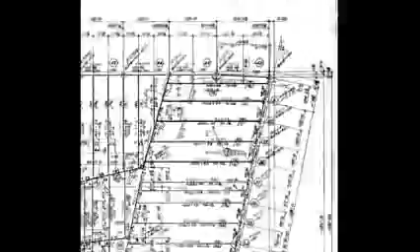NIST's collapse hypothesis for World Trade Center 7 involves floor beams at the northeast corner of the building pushing a girder which spanned columns 79 and 44 off its seat and initiating the collapse of the building. In case you're not familiar with this hypothesis, we'll summarise it very quickly for you.

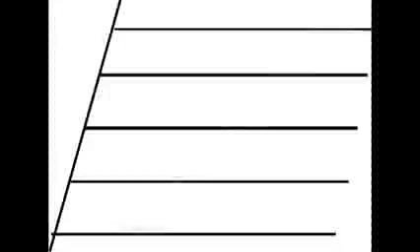The 5 lines running from left to right are floor beams which are said to have pushed the girder, which is running up and down, to the west by thermal expansion. So in order to look at this closer, we have to look at the connection, which is circled green. And we're going to look at it from the opposite direction, from the tip of the green arrow.

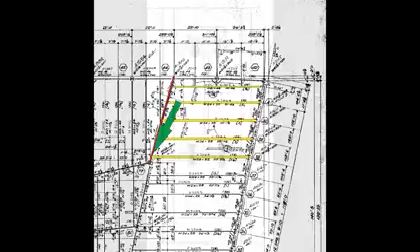So what we need to find out is how NIST represented this connection, and was this connection indeed vulnerable to the type of failure that they supposed. And they look at first glance to have done a reasonable job until you look at the drawings and realise that they missed out 2 stiffener plates which should have been on the girder. And as you will see, to omit these plates has huge consequences for their story.

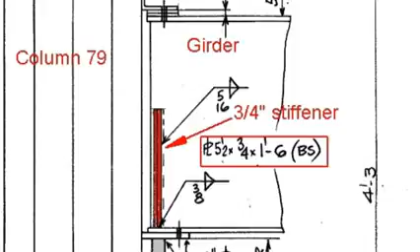So let's take a look at the elements that made up this connection. First of all, there are the stiffener plates. You can see there are 2, one either side of the girder. When you look at how they're connected, they're welded at the bottom and the sides by 3/8 and 5/16 welds. They're called out as PL, they're 5.5 by 3/4 by 1'6", and the BS means that they're on both sides. You can see them in Frankel 9114 fabrication shop drawing.

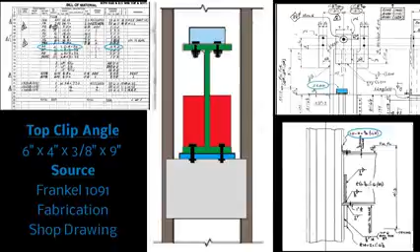On the sides of column 79 there are side plates. They are 2 inches by 26 inches and are attached by means of welding in lengths of 25 foot 6 inches. You can see them in Frankel 1091 fabrication shop drawing. At the top of the girder we have a top clip angle. It is 6 by 4 by 3/8 by 9 inches. You can see it in Frankel 1091 fabrication shop drawing. The girder is attached to this clip by means of 2 bolts.

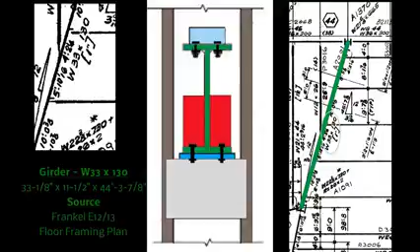As for the girder itself, you can see that in Frankel E1213 floor framing plan. The girder is 33 1/8 inches by 11.5 inches by 44 foot 2 7/8 inches. The girder sits on a seat plate, which is called plate PF. Plate PF is 8¼ inches by 1 inch by 12 inches. It can be seen in Frankel 1091 fabrication shop drawing.

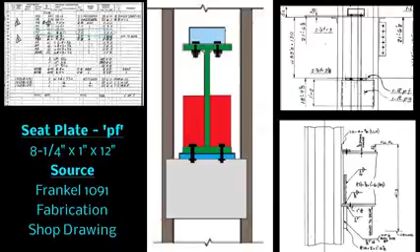NIST strongly asserted that this plate was only 11 inches wide, but it is in fact 12, and they have admitted this error now. Directly below this plate there is another plate called out as PG. It is 14 by 2 by 18 7/8 inches. It is referenced on the same drawing.

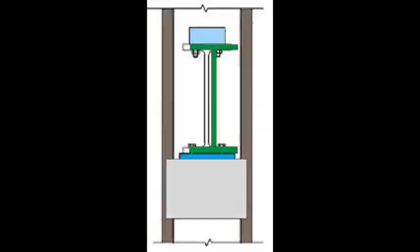Now let's see how these elements would work together in terms of NIST's collapse hypothesis. In particular, we're going to look at the difference that the inclusion of the stiffener plates would have made to NIST's hypothesis. What you see straight away is that these stiffener plates increase the load-bearing surface that the girder has. With the stiffener plates included, the girder redistributes load over a wider horizontal area. Effectively, what they do is they increase the load footprint of the girder.

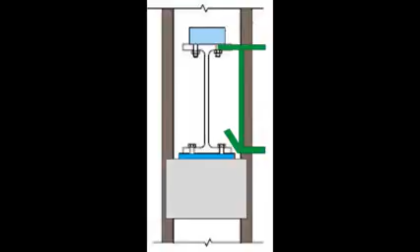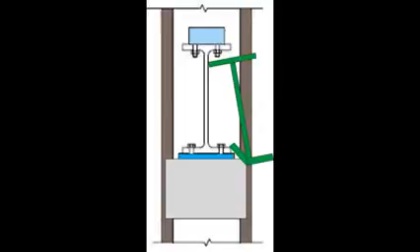And in terms of NIST's explanation, this means that the girder would have to be pushed far further in order to fail. The inclusion of these plates totally invalidates NIST's initiating event hypothesis. Without the stiffener plates, NIST's hypothesis is highly suspect, but with them it is simply impossible. NIST have been formally asked to comment but have refused to do so on the issue of the stiffener plates. It's clear to see why.

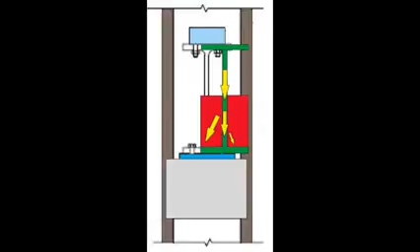It is because these 2 plates invalidate NIST's whole report on the collapse of World Trade Center 7. They make NIST's supposed initiating event for the collapse of the building impossible, and in doing so invalidate their whole report into the collapse of World Trade Center 7. To exclude these critical structural elements in their analysis is beyond incompetence.

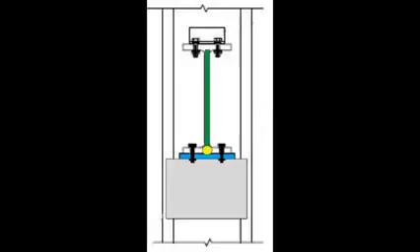A formal complaint is currently being lodged in a court, so the existence and the relevance of these 2 plates will be a matter of court record. NIST have filed a false report either unwittingly or knowingly. And this can mean one of 2 things. Either they are guilty of scientific fraud, or they have not competently investigated the collapse of this building. Either way, their story is in shreds, and the call for a new investigation into the collapse of World Trade Center 7 is validated.